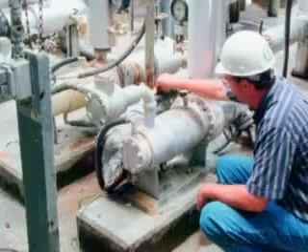We are Teikoku USA, the largest manufacturer of sealless, canned motor pumps in the world. Since 1956, we have designed and produced pumps for handling the difficult fluids commonly used in the petrochemical and refining industry. Thus, virtually all toxic, explosive, hazardous, and carcinogenic fluids are simply not a problem.

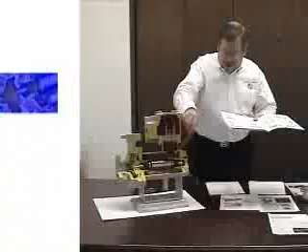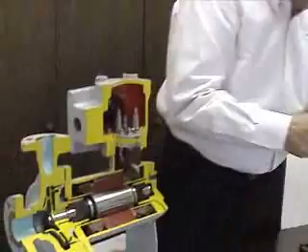Teikoku is also committed to safety, and we work hard to ensure that all of our products are environmentally friendly. In addition, effective March 1, 2003, ChemPump is now a division of Teikoku USA. This training video is designed to inform Teikoku representatives about the company's products and comparative benefits, and likewise to train in the diagnosing and evaluating of the existing pumping problems of potential customers.

I'd like to welcome everybody to Teikoku USA. This is going to be a presentation and basically a training video for use by our sales organization, reps. And I want to cover, essentially, the highlights of our product, our organization, and how to sell our products and how we handle the competition.

Teikoku USA is headquartered in Houston, Texas. The organization consists of Soji Sanahara, who's our president. I'm Denny Fagan, Director of Sales and Marketing. John Lumpkin is our regional manager handling primarily the refrigeration market. We have Brian Powers, who's an application engineer, along with Scott Yocklin, an application engineer, and Steve Tanner, who also, besides an application engineer, heads up our parts and repair organization. We also have Bud Clay, who works out of his home in Pensacola, and Bud is a regional manager. And that's pretty much the organization.

We're backed, of course, by our organization in Japan, and all the products currently are manufactured in Japan.

Right now, Teikoku produces more units in one month than the whole United States market for both canned motor pumps and mag drives buys in a year. I want to stress, though, that that is really in the ANSI sizes. This does not include fractional horsepower and mag drives such as Little Giant and that type of thing. But I'm talking ANSI sizes, 1.5 inch by 1 and greater.

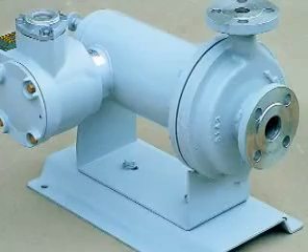But at the same time, it also accounts for why Teikoku has been so successful, is simply because we built so many units, literally hundreds of thousands of units, compared to other people who only produce several hundred units a year. So our learning curve has been much steeper, and it really has shown up in the reliability of our products.

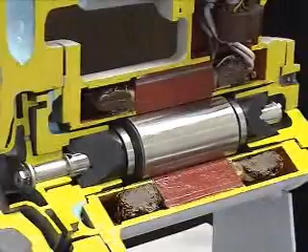What is a canned motor pump? And I say this because I know there are some people that really don't have a good understanding of what a canned motor pump is. A canned motor pump is simply a motor and a pump combined into one unit, which eliminates all the packing and all the seals. Now, at the same time, what makes it work is that we separate the liquid from the motor with a thin alloy can, usually a Hastelloy, but also many other alloys can be used, and we encapsulate the motor rotor also in an alloy can, and hence the word canned motor pump.

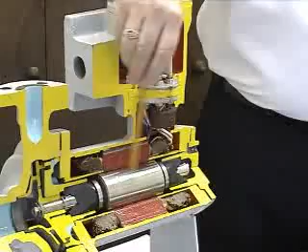The thing that's really significant about a canned motor pump is that the motor housing becomes true secondary containment. Secondary containment is a very common word used in the nuclear power industry. If you've all seen the big concrete domes around a nuclear power plant, that's called a containment building. And so a canned motor pump has the advantage of, in fact, the motor housing becoming the secondary containment. So if there is a failure of the primary can, the motor housing becomes the backup.

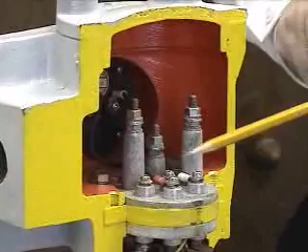It's very important, however, that where the electrical wires come through, they're also sealed, because what can happen is that if you get liquid into the motor and it's hot enough, it can turn to gas, and so the connections have to be actually gas tight. So it's really important that the unit, even in a failure mode, eliminates any leakage to the atmosphere.

The question really was, why would you buy a Teikoku over competitors? And in actuality, there's a really good paper that was written that compared our competitors, and I really have you take a look at this because it really discusses in detail the big differences between our competitors. However, if I really talk about what distinguishes us from our competitors, it is really reliability.

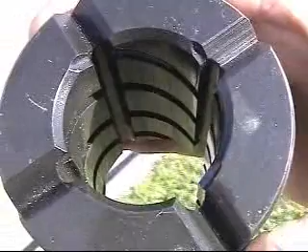What really makes Teikoku more reliable comes down to two things. Number one, and most important, is flow through the bearings. The bearings on a Teikoku pump have extremely large grooves, and these are very important to overall reliability. If you don't cool the bearings sufficiently, the product can flash in the bearings, causing the bearing to run dry, and the pump will fail very quickly.

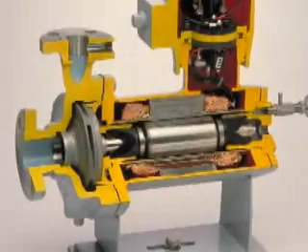This is the number one cause of sealless pump failure. After 20-some years of experience, we identified this as the number one cause, and yet none of our competitors address it today. We put 3 to 5 times more flow through the bearings than any of our competitors, which nearly eliminates the possibility of dry running and flashing in the bearings.

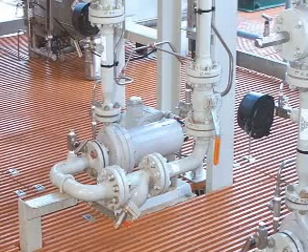The other important factor is balancing. In sealless pumps, can motor pumps and mag drives, the bearings have to operate in the pump fluid itself, an extremely hostile environment. They're not running in lube oil or grease. Because these bearings have to survive in such a hostile environment, it's very important that the rotating components, primarily the motor rotor shaft and the impeller, are balanced to a very high level of accuracy.

What Teikoku does as standard is balance all individual components to ISO 1.0. This is ISO standard 1940, a level of accuracy in balancing where 1.0 is the best and 6.0 or greater is the worst. All the components in a Teikoku pump are balanced to 1.0.

The assemblies, however, when put all together, we balance to ISO 2.5. Not quite as good, but still very, very good, and it results in very high reliability because you're putting much lower loads on the bearings. Between the high flow through the bearings and the balancing, that's how you get the life out of it.

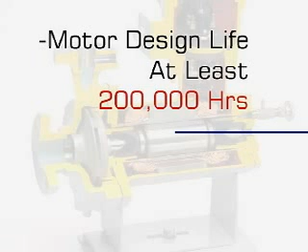At the same time, the motors are designed to operate for a 200,000 hour design life. This is important because if you run a motor at too high a temperature, it will fail. The average motor design life is 30,000 hours. In a can motor pump, since motors are difficult to replace and expensive, you want the motor to outlast the pump, so we have a design life of 200,000 hours. In reality, the motor should outlast the pump, and that's what we want.

How do we get a design life of 200,000 hours? Simply, you reduce the winding temperature. In the Teikoku case, our motors are designed as standard for 200,000 hours design life, so we make sure the motor runs substantially cooler than its maximum design, ensuring it runs much longer. That's how you do it by reducing the motor temperature. Simple. Motors fail because they run at excessive temperatures.

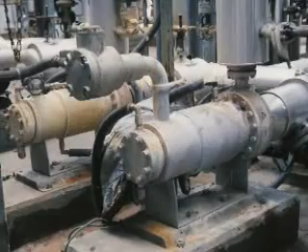The electrical engineers tell us that for every 10 degrees C you exceed the motor winding temperature, you cut the motor life in half. So if you have a 220 degree C system and run it at 230 degrees C, the motor life will go from 30,000 hours to 15,000 hours. It's very important to make the motors run cool.

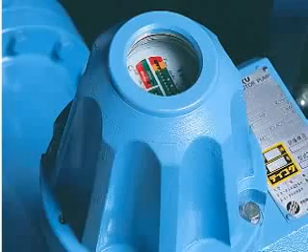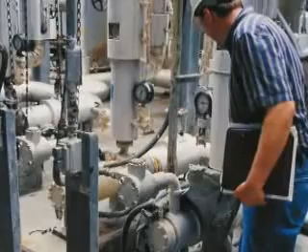At the same time, the thing that has changed canned motor pump reliability more than anything else has been reliable bearing wear monitoring. I cannot stress how important bearing wear monitors have become. Back when I started 20-some years ago, nobody had bearing wear monitors, and we let motors and pumps run until they failed. As a result, over 90% of canned motor pump failures were catastrophic. Today it's the opposite. With accurate bearing wear monitoring, we've reduced that to a very small percentage, usually occurring only when people ignore the monitors.

The monitors are standard on all Teikoku pumps. Whether you want it or not, you're going to get a monitor, and we do it in two ways. We have a monitor that's actually mounted right on the motor itself. That is a standard unit.

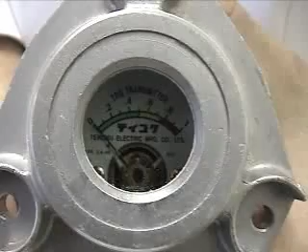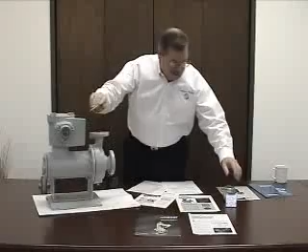It's here, and it shows it's standard on all the units. It's also available as a remote unit, so we can mount this on a control panel in a control room up to a couple hundred feet away.

At the same time, it is progressive. It's not an on-off — I've had some people call it a turkey popper. Some of our competitors' version is basically a gauge, it just goes from good to bad, and you don't want that. You want a progressive monitor that shows you how the bearing wear is progressing.

So if you're only going to shut the plant down every couple of years for maintenance, you want to know that the bearings are beginning to wear, and you want to change them at the time of the turnaround instead of waiting for a month after the turnaround and shutting down. So progressive bearing wear monitoring is very, very important.

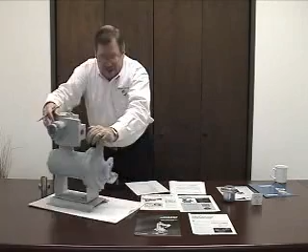And I say it's standard in all units. It can also be put into a DCS system with a 4 to 20 signal to shut the pump down automatically — a couple of different ways. The bearing wear monitor has greatly enhanced reliability in canned motor pumps since its introduction. By the way, Teikoku introduced their monitor in 1980, so it's been around now for over 20 years.

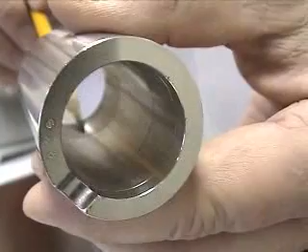Another way that we achieve reliability, tied in with balancing, is that the shaft sleeves are machined to a very, very high tolerance, and they're undercut at both ends, so just a very small part of the sleeve touches the shaft. They're also notched to make sure they always go back in the same plane after the unit is balanced. As a result, not only do you have a very high degree of accuracy in the balancing, it's also repeatable, which is very important, so you can take a unit apart after it's balanced and make sure the balance has been repeated when you put it back together.

The same thing applies when you replace components, such as an impeller or sleeves. At the same time, the thrust washers, which mount on the shaft next to the shaft sleeve, are hard-faced as well as the sleeves, usually with stellite, to improve reliability and get longer life.

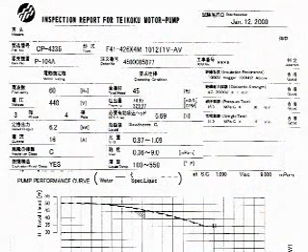All Teikoku canned motor pumps are performance tested, every single one, which means we have baseline data. So when that unit is put in the field, we have a record of that motor and pump and how it performed, so we can accurately predict what's going to happen in the field. If there's a question in the field about how the unit's operating, we have a record. No other manufacturer does this as standard. We test flow, head at least 5 points, as well as the NPSH. This is a really important feature we offer as standard that nobody else will do.

The question is, how do you get test reports? It's actually supplied with every pump automatically. In other words, when you get your documentation from Teikoku, we send out that test report as standard. There's no big question — we want people to have it.

Teikoku is an ISO 9000 company, ISO 9001, which is obviously very important in today's marketplace. At the same time, there's a pump standard issued by the API, the American Petroleum Institute. The old standby was API 610, which covered conventional pumps. Two years ago, in October of 2000, API 685 was issued, which covers sealless pumps, mag drives, and canned motor pumps. There's very little difference between the two standards as it applies to pumps — primarily the nozzle loads — and units must be designed to ASME Section 8.

And we have always complied with that. 685 though has much more specific requirements when it comes to testing secondary containment. And secondary containment is standard on a canned motor pump because of the motor housing — it's much harder to achieve in a mag drive.

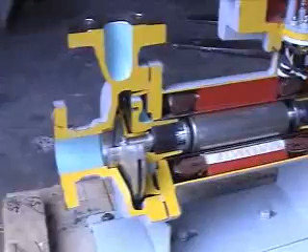We just had a letter from a customer the other day that replaced a number of their pumps, mechanical seal pumps. They're currently saving over $200,000 a year in mechanical seal cost savings alone, just on the 30-some pumps they've changed. So there is a significant return on investment, but each customer has to look at their own.

But really what's important, what we found, is that the most significant saving is on the install cost. You can save 40% of the installed cost over a conventional pump with a canned motor pump because you have no millwright labor, no alignments, no leveling of the base plates, and you don't have to grout a canned motor pump base plate.

So we know that 40% of the installed cost you can save by using a canned motor pump. And if we can get that into the evaluation, that usually makes up any difference between a standard pump and the canned motor pump cost.

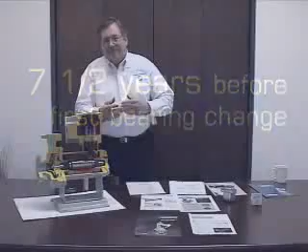The fact is we're going to run longer, I say 7.5 years is the average time between bearing changes, but most people won't give you that in the evaluation because that's down the road. They're going to get that further up, but we can get the 40% up front. So it's important that we get involved with the project early enough that the engineering company can give us that in the evaluation so that we can really see that kind of savings.

Okay, the difference between Teikoku and other canned motor pumps, as I said, we talked about the bearings, we talked about the balance, how important it is, and in reality, it's our broad coverage of product lines.

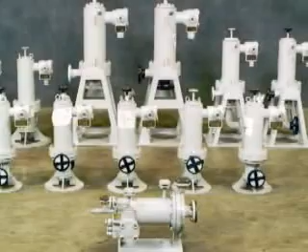The fact is that we offer a broader line than any other manufacturer in the world, and when you look at our latest brochure, you're going to see on the cover that we talk about a vertical inline unit. This has some real advantages we're going to talk about a little while longer.

At the same time, we offer really a very broad range of products, starting with a unit like you see here, which is our standard horizontal unit. We call this a V-type simply because the product flow comes off the discharge across the rotor, back down through a hollow shaft, back to suction. It's a very typical unit and will handle a large majority of applications.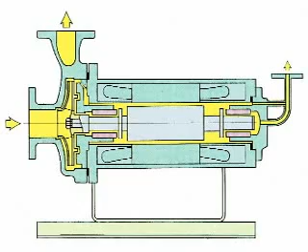In turn, we go through a reverse circulation unit, which is really used for volatile fluids with steep vapor pressure curve, commonly used for refrigerants.

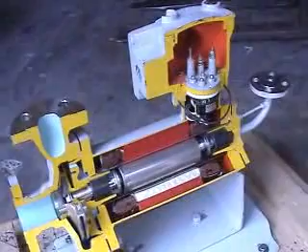And again, once we go to a vertical unit, we use vertical units primarily because of a smaller footprint, they're easier to install, but at the same time, when we handle low viscosity fluids, steep vapor pressure curve, we reduce the loads on the bearings. And by reducing the load on the bearings, we increase the life. So vertical units will always run longer than a horizontal unit will, simply because we're taking load off the bearings.

I can't tell you how much longer that is, but the fact is that a vertical unit will always run longer on the same application than a horizontal will. At the same time, horizontals make up a huge percentage of the market.

And then we go into the jacketed units. We offer both a fully jacketed unit and partially jacketed. We can put steam jackets, water jackets on all of these pumps. And by the way, we can offer any of these pumps in vertical configuration, not a vertical inline, but we can take any pump just like this, put it on a fabricated stand, and offer it as a vertical unit. So all the pumps can be done.

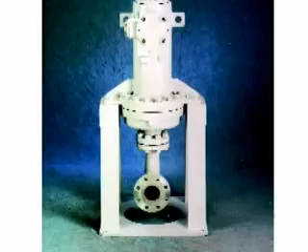And then we go into the high temperature units, and here we'll talk a little bit more about those. The high temperature units are offered essentially in two different designs. The more common one, which has been around for a long time and has no limitation really on size, is a water-cooled unit. Water-cooled units, I say, have no limitation on size.

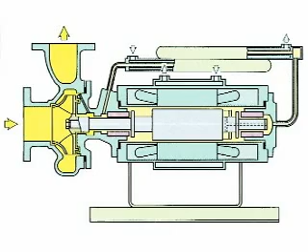We build these up over 250 horsepower currently, and they can handle a wide variety of applications. However, they have the big disadvantage that they require water cooling. At the same time, if you have water quality problems, or limitations on water at the site...

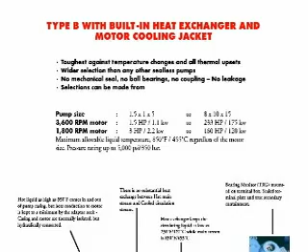...then we really want to go to what we call ceramic motors. The ceramic motors do not require any water cooling, and hence are more reliable. Unfortunately, they're currently only available up to 75 horsepower, so we do have some size limitations.

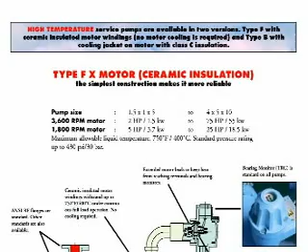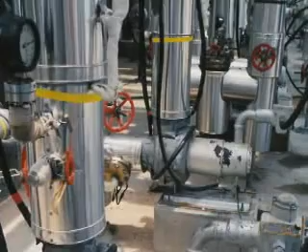The ceramic motors are certainly preferred when we have the right size, simply because they are going to be more reliable. The same design philosophy applies to the ceramic motors: we make sure the motors run cooler than the maximum allowable temperature for the 200,000 hour design life.

These have, in fact, been built over 20 years now, and have proven to be incredibly reliable. I can count literally on one hand the number of failures we've had, and all of those have been because of excessive temperatures caused by excessive starts when the motors are locked rotor.

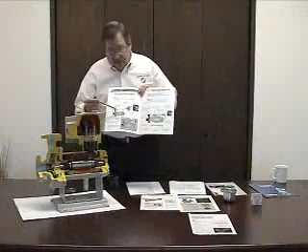They handle a lot of high melting point materials, and operators will come in on Monday morning after the unit's been shut down over the weekend. The unit is solid, they continually push the button to try to start it, and the motors fail from overheating. That is by far the way these fail.

If they're run within the normal product ranges and the way they're supposed to be, they should outlast the pump without question.

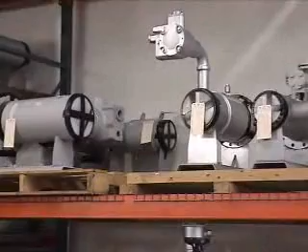The question was, are they available in the ANSI B73 size? They certainly are. We currently have 11 sizes that are available as ANSI sizes. It does limit us somewhat in what we could offer in ANSI sizes, simply because we offer more models than non-ANSI sizes, but we certainly have ANSI sizes, and more are coming. So we certainly can offer ANSI sizes.

We talked about the vertical construction. I want to go a little bit more into reverse circulation. Reverse circulation is really our way of handling volatile materials such as refrigerants.

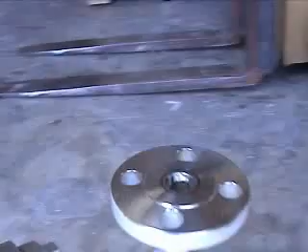What we do is, instead of returning this flow back to suction through the hollow shaft, we actually add a flange at the back end and take it away externally, which means we're not bringing the heated liquid back into the pump suction, but taking it away externally.

And this has been proven extremely reliable. We have literally thousands of units on ammonia that have worked extremely well because of this feature.

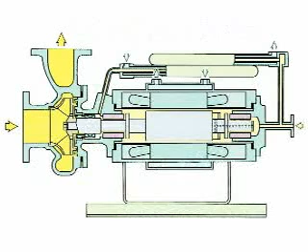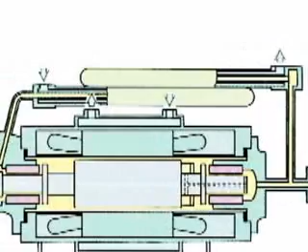We also can supply slurry designs. The slurry designs are where you bring in an external flush. This external flush has to be compatible with the pump fluid, but it allows us to segregate the bearings and put clean fluid in the bearings.

There are several designs we can do, using either mechanical seals or close clearance bushings, and this really depends upon how much of the barrier fluid you can put into your process. But the fact is, we can handle slurries extremely well.

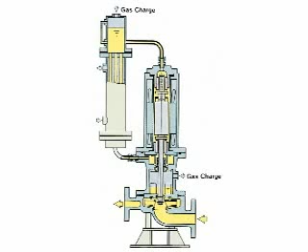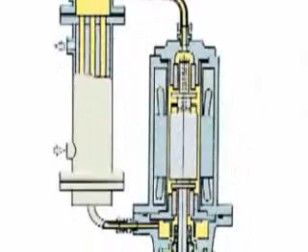At the same time, we offer another slurry design: gas sealed. Gas sealed basically means we isolate the pump fluid with a gas barrier, as opposed to a barrier fluid with a seal. There's also a seal in the gas barrier, but we separate the fluid from the motor with a gas barrier. This is a very effective way of handling higher concentrations of slurries than you can with a standard slurry design.

We also offer a self priming pump and multi-stage pumps, keeping in mind that the multi-stage pumps can also be handled as verticals. The self priming pumps cannot be furnished as a vertical configuration, but all the rest of the designs can be.

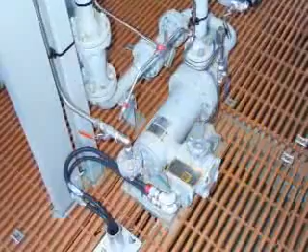Again, the bearing wear monitor is really important. I cannot stress often enough how important bearing wear monitoring is, and I stress reliable bearing wear monitors. There are competitors out there that offer bearing wear monitors, and they have not been reliable. It's a real concern, to mine anyway, that they are trying to offer something that is not giving the customer the kind of protection they really deserve and need to make these products reliable.

I get asked this question all the time: what's the difference between a mag drive and a canned motor pump?

Again, the basic design is that they use product lubricated bearings. So the fact is, we have the same vulnerability to solids, to dry running, that everybody else has. There's no difference as far as that design is concerned.

And I can make either one work well. The bottom line is, however, magnetic drives do not have secondary containment most of the time. There are a couple designs out there that do offer it, a second can, very expensive to repair, but as a standard, they do not have secondary containment, which means if the unit fails, it can fail to atmosphere.

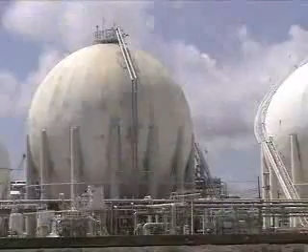Believe me, I know one customer where they recognized the difference, and they said, well, we think magnetic drives can handle solids better than canned motor pumps, so they used magnetic drives and they put a containment building around the process. They literally put a concrete building around the mag drives. That's not true. Mag drives are just as susceptible to solids as canned motor pumps.

There's really no difference. It's the bearings they're concerned about. If you put silicon carbide or some kind of hard metal into that pump, it's going to wear the bearings. You can't change it.

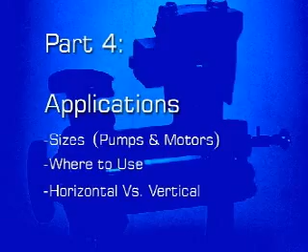Sizes. Teikoku publishes that we go up to 800 horsepower. In all honesty, we're really limited commercially, I feel, to 230 horsepower.

Also, when you get to the multi-stage pumps, you have lower flows and lower heads simply because you're going to run out of horsepower. And when we talk about hydraulic coverage, there's no one who can offer the hydraulic coverage that we do. We go from literally very low flow to well over 2,500 gallons a minute, and heads of close to 2,000 feet.

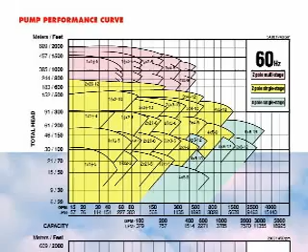But again, concentrations, our sizes will vary depending upon the applications. We don't offer self-priming pumps, as an example, up to those sizes either. So again, we can get you quotations usually within one day. Get us the inquiries and we'll get the information to you.

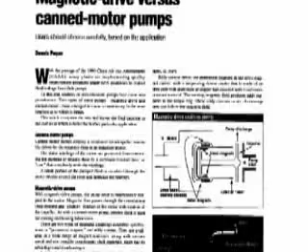And the comparison between mag drives and canned motor pumps, I wrote this paper several years ago. It came out in Chemical Processing magazine, and it goes into a lot of detail. I really encourage you to use it.

But the bottom line, the conclusion, is that the major difference between a canned motor pump and a mag drive is the fact that a mag drive lacks secondary containment. For all intents and purposes, that's the major difference. So customers have to realize that a mag drive can and will fail to atmosphere.

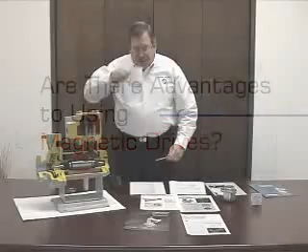And the question is, is there any advantage to using a mag drive? The best advantage is the fact that you can use a standard motor. So in a standard mag drive with a coupling, the fact is you can use a standard motor, and that is a big advantage. However, reliability studies have shown that once you introduce a coupling between a motor and a pump, the reliability goes down 40 to 50%.

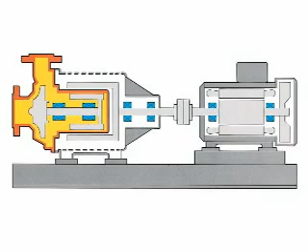So the couplings do allow you to use a standard motor. What most magnetic drive manufacturers do is offer a flange-mounted motor instead of a coupled unit to get better reliability. At the same time, that takes away the advantage of having a standard motor.

When you go to a flange-mounted motor, the motor shaft now becomes the pump shaft, and you lose that interchangeability. C-flange motors are relatively easy to get, but it's not a standard motor. You can't take a standard motor off and put another one on with a flange-mounted motor. So you lose that advantage, but they do get the reliability.

Applications. I always tell people you can use canned motor pumps for everything from alcohol to xylene. But at the same time, where are they used the most?

Historically, canned motor pumps were used on lethal services. So back 50 years ago when it started, typically they were used for phosgene, cyanide, HF. So you had lethal services, and that still is a portion of our business.

However, what's happened is that people have tried to use them more and more, specifically for things like hydrocarbons, and I call it difficult to seal fluids. So you start out with the toxic, lethal services, which have historically been what the units were used for.

However, now you get into what I call the hard to seal fluids, or anything low viscosity. So typically they include light hydrocarbons, things like ethylene, propylene, any of the light hydrocarbons. At the same time, heat transfer fluids.

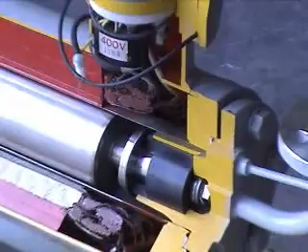Then you have typically just odorants, so sulfur-bearing compounds, mercaptans, H2S, sour water refineries. These are applications we're seeing more and more of simply because the stuff smells bad. Heat transfer oils can also smell bad. Dowtherm specifically smells bad. And then you have just expensive fluids. There's no toxicity, no real problem with them, except that they cost a lot. So any kind of seal leak costs you a lot of money. That is becoming an emerging market, that people realize they can have a significant loss of product and high cost loss, and they can avoid that by using the canned motor pump.

canned motor pumps, by their inherent nature, are explosion proof. There's been a lot of talk about labels, explosion proof labels, and what the industry needs today is third-party certification. What Teikoku has always done is have explosion proof motors for 35 years, certified to JIS, which is a Japanese industrial standard, very similar to UL and FM. The fact is all of our motors, or most of our motors I should say, can be supplied as explosion proof, and they're inherently explosion proof anyway, even without a label.

So they're very safe, but we can in fact supply explosion proof models in most applications. However, you've got to be careful sometimes because the temperature and other classifications might mean we could not furnish you a motor specifically for that application. Interesting though, as an example, the high temperature units, most of the codes don't allow that you can go to 400 C, 750 Fahrenheit is standard. Our motors have an explosion proof label at that level. So you can in fact use a T1 rating, it's called, at very, very high temperatures in an explosion proof area.

Where I find the problem is that most plants don't recognize they can operate, let's say, a heat transfer system at 750 degrees Fahrenheit, and they put a T3C rating on a motor, which is 180 C, 347 Fahrenheit, but they're actually in violation of the code because they're operating surface temperatures far above the motor rating. It becomes an issue, especially with mag drives. So you have to be cautious to make sure if someone invokes a lower temperature rating on a heat transfer pump that you discuss it with them and make sure it gets changed, because we cannot comply with that, since our skin temperature on the motor will in fact be much higher. But explosion proof motors are certainly available.

And the hot oil market, heat transfer, is one of our largest markets, and it's growing. Number one, it's very hard to get mechanical seals to work when you get to these high temperatures. Also, the hazard to personnel has always been a factor, but reliability is the key. As you get higher and higher in temperatures, the pumps see a lot of nozzle loads. They see a lot of pipe strain. And because of that, the pumps get out of misalignment.

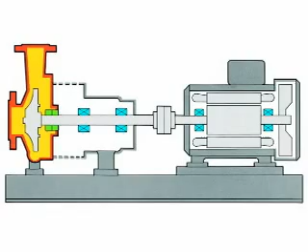So a conventional pump, a lot of times when you get up to these operating temperatures, has misalignment issues. You see bearing failures, you see seal failures, and because a canned motor pump has no couplings, we can take very, very high nozzle loads and eliminate that problem. So we get the reliability quite often simply because these pumps can take very, very high nozzle loads, have no misalignment issues, and the reliability goes up accordingly. I call it weekends off. So we really want to stress the high reliability and all of our experience over the years in being able to prove this high reliability.

And again, we talked a little bit about horizontal versus vertical. I can't stress it again. Vertical pumps will always be more reliable than a horizontal in the same application. And for all intents and purposes, there's no change in cost. So we try to really push the vertical units wherever we can, simply because it's going to be more reliable.

It's absolutely essential to use them on very low viscosity fluids. I know a number of jobs where we've seen viscosities lower than 0.1, 0.01 type of things. They're absolutely essential. In fact, we'll turn down the order if somebody comes up with a low viscosity application and insists on using a horizontal, we'll turn it down. It's really important on low viscosity fluids, and as the units get bigger, it becomes more and more important.

The question is about low temperature applications. canned motor pumps love cold, while electric motors don't like heat. When you get into a cryogenic application, we have one running right now on liquid nitrogen at minus 310 Fahrenheit. But below about minus 150 Fahrenheit, we have to start looking at some special designs. Down to minus 150, a standard unit will do it, except once we get below minus 40, we have to change the external parts from carbon steel to stainless. The whole unit has to be stainless below minus 40. But cryogenics are really a good application, a good point.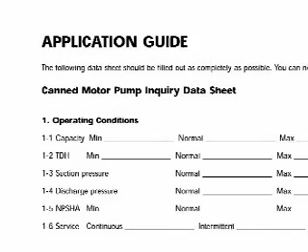One thing included in this guidebook is an application guide, and this application guide is really important. You cannot tell us too much about the application. You may not be able to fill this sheet in completely, but if you do half of it, I'll really be happy. You cannot tell us too much.

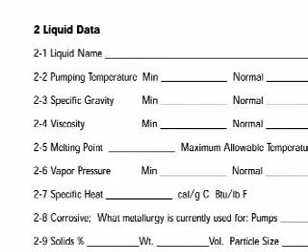So we need to know what kind of problems they've been having, but specifically, are there any solids? What's the makeup of that fluid? The physical properties obviously are very important, but we really need to know what kind of problems they've been having.

Quite often with a mechanical seal pump, it could be misalignment, and that's easy to fix. However, it may be the fact that they run the pump dry occasionally because of the nature of the process. We need to know that - we can, in fact, protect the pumps from dry running.

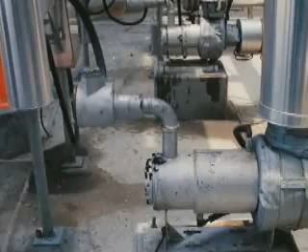We really recommend that you use a device like a load control, a power monitor, that will protect the pump from dry running. It's the cheapest insurance I know of, and I'd like to see it on every pump. So besides the bearing wear monitor, dry run protection - some way to make sure the pump does not run dry repeatedly - is really important.

Also, NPSH and suction conditions - all of these are important, and we need to know what they are. We can work around them, and one of the things a canned motor pump can do better than almost any other pump is handle low NPSH applications very well. But at the same time, we need to know what those are. And one word of caution.

Inducers - we have a broad range of inducers, and most of our pumps we can put inducers on. However, an inducer is really an axial flow pump, and an axial flow pump has a unique characteristic: the NPSH curve on an axial flow pump is in fact a big U, which means at one specific point on the curve we can really reduce the NPSH. But the NPSH required at other points on the curve can be higher than without the inducer. So you really have to be careful when you apply inducers, but they're very effective when we talk about lowering NPSH.

The question was, what about pressures? There is no pressure limitation on a canned motor pump. We have built them over 5,000 psi now. You could go to 15,000 psi. So there is no real limit on operating pressure for a canned motor pump.

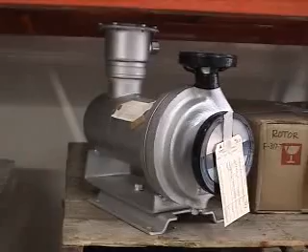The question is, can you change the speed? Canned motor pumps love variable speed drives, and I'd like to see more of them, because one of the biggest problems in the pump industry is that people oversize pumps. If you make the pump too small, the pump won't pump, so historically people oversize pumps, making them larger than they have to be. Variable speed drives eliminate that problem, but one of the big issues with variable speed drives is cooling the motor. Since there are no fans on a canned motor pump, we can in fact use a variable speed drive.

The only thing I'd caution you about is to make sure the unit's designed for a variable speed drive, which means you have to put in some type of line reactor between the drive and the motor. Even with a spike resistant winding, we want to make sure that motor is protected by using a suitable line reactor between the drive and the motor. But the pumps themselves love variable speed drives.

I want to finalize this by going over some of the key points. We put out a standard proposal form, and in that form we talk about what makes Teikoku important, or what makes sealless pumps important to the customer. Number one, of course, there's no leakage. This pump has secondary containment.

Is it possible? Yeah, anything's possible. People can blow them up. But we try very hard not to, and I personally, in my 8 years now with Teikoku, have never seen our containment fail. So because of the conservative design, even under extreme conditions, you should never experience a leak.

There's no alignment needed. It's very compact, with a very small footprint. It's inherently explosion proof, and they're field repairable. No external lubrication is required. You don't need oil pots, you don't need seal pots, and of course no mechanical seals or complicated seal systems.

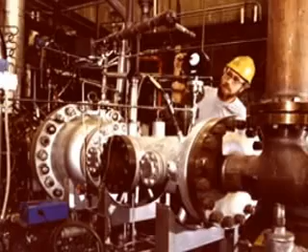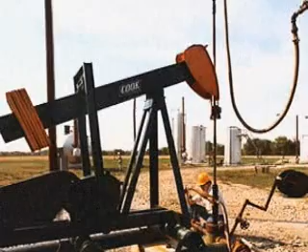The question was about oil-filled stators. Oil-filled stators have been around since the 1950s. Oil filling was done primarily to get more horsepower out of the motors. I personally consider it too much of a hazard. The earlier oils were PCB oriented, and then they started going into transformer oils, more friendly oils with silicone. But again, it was only used to stretch the available horsepower of the motors, to keep the motors from running too hot.

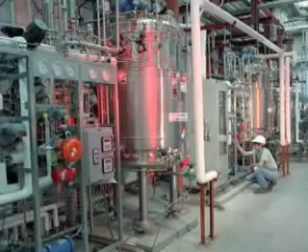Teikoku basically limits temperature rather and doesn't require oil. The motors are going to run much cooler. One of our competitors' thermal devices in the motor, called TCOs, thermal cutouts - ours are set at the maximum motor temperature. Our competitor sets them at almost 50 degrees higher than the maximum motor temperature. They constantly burn out motors because they had too many nuisance trips, even with oil. So oil does not guarantee the motor's going to run cooler. It was just a way to try to get more horsepower for less money. The secret really is to make sure the motor runs cool enough to get maximum life out of it. Oil has nothing to do with that.

The question is, why is the Teikoku bearing wear monitor better than the competition? Number one, it's continuous - it looks at the bearing wear continually, and if the bearing was going to wear very quickly, you could sit here and watch this needle go up. We've seen a couple people do that because the pump was running dry or was under extreme duress, and they could really see the bearing wear occur as it goes. Our competitors don't have a continuous readout.

There are two types of monitors out there currently. There's what I call the turkey popper - it's a pressure gauge, it's either good or bad, on or off. It basically just shows when the unit fails. The newer ones, which have very fancy readouts and cost a lot of money, typically around $2,000 adder, do get continuous readouts, but they're not reliable. They fail very rapidly, and there are many complaints that they have not been reliable. So it comes down to reliability and the fact that ours is continuous.

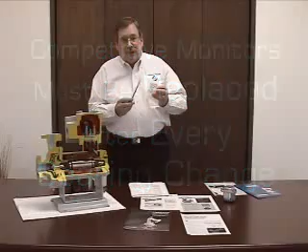The question really was, if you change the bearing wear monitor, what happens when you put in a new bearing? It will go back to the original reading. So there's no additional cost, whereas with the pressure gauge type of devices, it's a very expensive repair - you have to spend between $700 and $900 to replace that gauge because it actually has physical contact inside and it wears off some metal and you have to replace it. So our bearing wear monitor, once you replace the bearings, goes back into the green again.

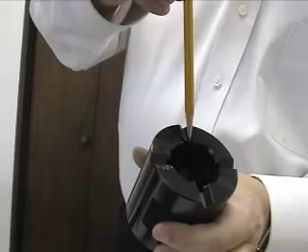The question was, is the bearing wear linear? Bearing wear is never linear. What happens when a bearing wears - the initial clearance in a bearing is typically like 0.003 of an inch. As the bearing wears and it doubles, once you get to about 0.006 of an inch, the shaft running in the bearing now has a little bit of imbalance, and so the wear becomes more progressive, so it's never linear. If you looked at a monitor and it ran for 5 years to go one point on the monitor, it's not going to take another 5 years to go to the next point. It's going to be progressively faster because you're introducing an imbalance.

The question is, what kind of fluids can we use in the refinery? Typically, most of the services are light hydrocarbons, so you have a lot of pentanes, hexanes, ethylene, propylenes. However, we also see a significant number of benzene-laden streams, just traces of benzene in sour water, H2S in sour water. So you have the light hydrocarbons and you have the benzene and H2S laden sour water streams. They're the most common in the refineries. Thank you very much.